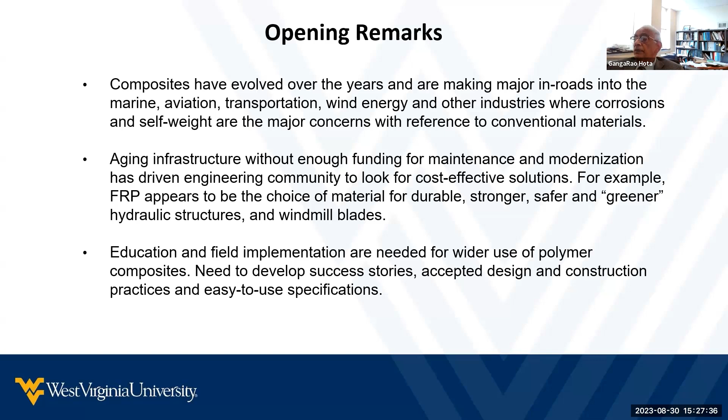This webinar, we are providing also the educational component. The structure of the course is such that the webinar is divided broadly into 4 modules. The first one being this one, entitled Introduction to Constituents of Composites, including manufacturing and their applications.

The second module is going to primarily deal with the durability or the long-term behavior under varying environmental conditions, including moisture, freeze-thaw effects, pH variations, sustained stress like the dead load or the pre-stressing effects coming onto a structure.

The third module is going to deal with the micromechanical properties determination of composites based on fibers and resins that go into the composites. And the final 4th module will deal with the design of composite members under tension, bending, and compression.

Due to time constraints, we will not get into composite system design, especially focusing on joints in these 4 modules, though we have a wealth of technical information in the form of slide presentation for the design of composite systems.

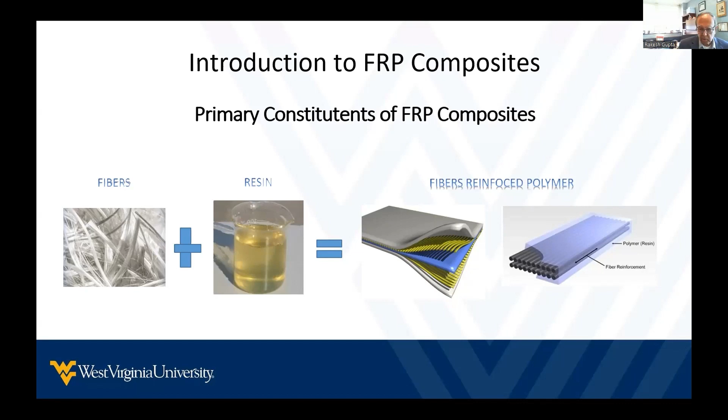A composite, then, is a heterogeneous combination of two or more materials. In fact, as the name suggests, there are two or more distinct phases which you can see under a microscope. So you have reinforcing elements such as fibers and fillers, and you have binders as resins or polymers. These materials differ in form or composition on a macro scale, and this is easily seen under a light microscope.

There exists an interface between these materials, and one often needs a coupling agent to promote adhesion between the fibers and the matrix. With glass fibers, the coupling agent is typically a silane.

The role of the two major constituents is, for the fiber, it is bearing the load, and for the resin, it is to transfer load to the fiber network, especially in shear, so that one can have a high interlaminar shear strength.

We want to maintain proper fiber orientation, and the resin prevents bunching up of fibers. In addition, a very important role of the matrix is to protect the fiber network from a damaging environment, things such as humidity and high temperature, as well as oxidation. Else, durability suffers. And the nature of the fibers, the matrix, and the geometry of the part to be made dictates the processing conditions of time and temperature.

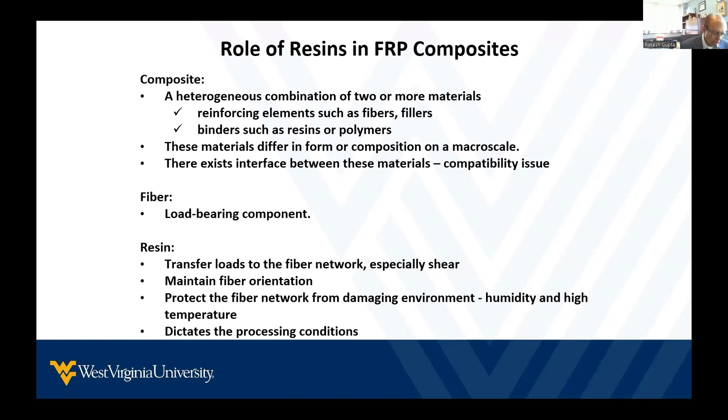All polymers are made from small molecules called monomers. When these monomers are combined, you get a linear molecule having a long chain structure. Most thermoplastics, such as high-density polyethylene, which are used for making milk containers, have a linear structure.

In addition to a linear structure, one can have branches emanating from the backbone. One can have long branches, and this is what is observed in low-density polyethylene, which is typically used for grocery bags.

When these long chains get linked together, the branches get linked together by cross-linking arms, they can form a network. In cured thermosets, such as vinyl ester, polyester, and epoxy, you have a network structure. An example of a network structure is rubber.

Natural rubber is a linear molecule. It is cross-linked with sulfur, and the process is called vulcanization. That makes rubber useful.

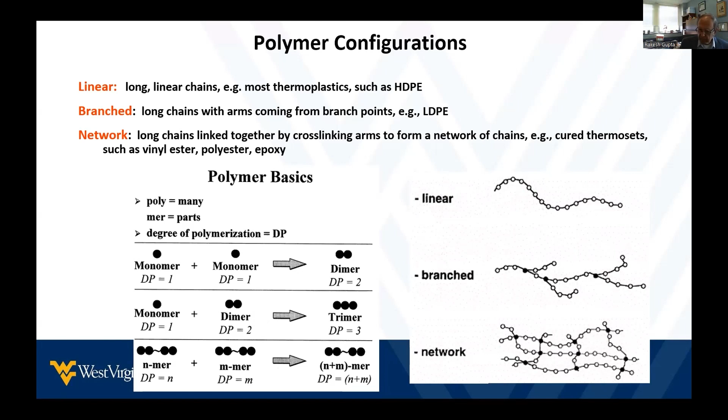The world of polymers is divided into thermoplastics and thermosets. Thermoplastics are large molecules which have already been made in a reactor, and then they are used to make useful products. With thermosets, one begins with small molecules which have a low viscosity.

Once the thermosets are formed, they do not flow upon heating because the liquid resin is cured and becomes rigid.

Other characteristics of thermosets are that the cured polymer is less temperature sensitive than thermoplastics. It will not soften upon heating.

The network structure exists throughout the part, and you have thermal stability so that the polymer does not flow upon heating. However, it can degrade at high temperatures.

The advantages of a thermoset over a thermoplastic is that one deals with low viscosity materials. As a result, one gets good fiber wet out, which means that there's good adhesion between the resin and the fibers, which results in a low void content.

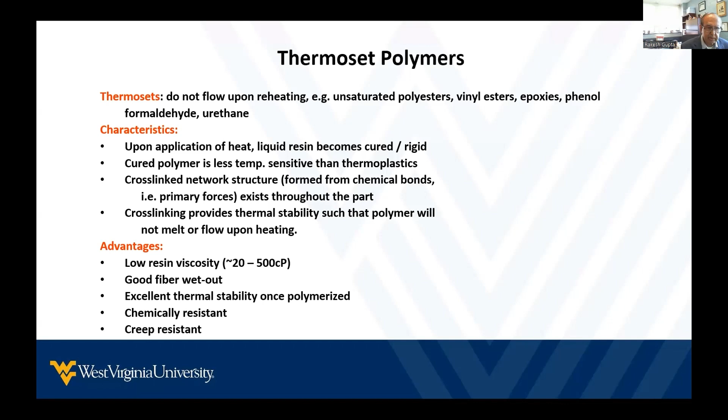There's excellent thermal stability once the material is polymerized, and the material is chemically resistant and creep resistant. Thermosets have some downsides as well. They are brittle, which means there's a low elongation at break.

With thermoplastics, one begins with a large molecule, and one heats it, it melts fairly quickly. You make a part, you cool it, it solidifies, and the process is over relatively quickly.

With thermosets, there can be a long fabrication time, especially when one deals with epoxies. There can be a limited storage life at room temperature before curing, because one uses curing agents such as peroxides. Even at low temperatures, they can decompose and curing can begin, so the shelf life is limited.

Thermosets are non-recyclable by standard techniques because they typically will contain fibers and fillers. The molding of the part is in the shape of the final part, which means that once we have made the part, we cannot change it later on, so these materials are not post-formable.

The most common thermosets are polyesters, epoxies, and vinyl esters. The polyester that's used is typically an unsaturated polyester, which means that there are double bonds present.

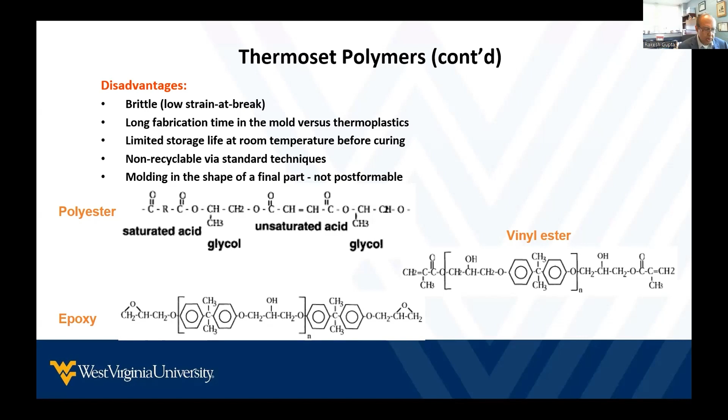If you look at the vinyl ester molecule shown here, it has double bonds at the two ends. These double bonds are then the sites for cross-linking.

Polyesters and vinyl esters are cured by dissolving the prepolymer in styrene, followed by cross-linking with the peroxide. Epoxies are cured using amines.

So you start with monomers, you get a prepolymer, you then cross-link it with either a peroxide or an amine, and the result is that you start getting molecules which have branches emanating from the backbone.

The glass transition temperature rises as curing proceeds. If the glass transition temperature reaches the cure temperature, the reaction stops, and this is called vitrification. If the temperature is raised, curing is resumed.

Typically one uses a temperature at which the cure goes to completion. Once it is completed, the material is typically used at a temperature below the glass transition temperature. If one goes to a temperature above the glass transition temperature, the material is rubbery.

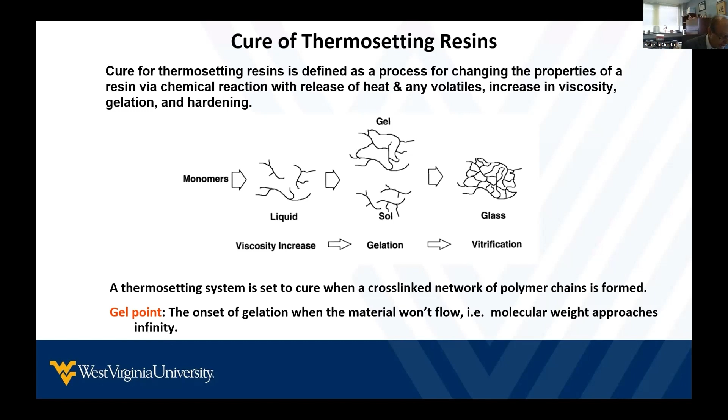For a given reactant concentration, the extent of cure, meaning how close the material is to being fully cured, depends on time and temperature. Also note that polyesters and vinyl esters typically shrink on curing.

Typically, for epoxies, it takes 60 minutes to several days for complete curing, whereas for vinyl esters and polyesters it takes 30 minutes to an hour. For urethanes, one can get curing in a matter of seconds.

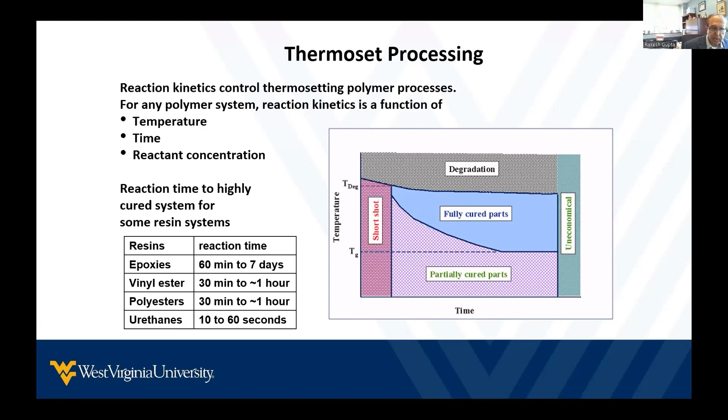The behavior of polymers depends on the temperature at which one is examining the behavior. At low temperatures, there is very little molecular motion and the material is glassy, which means it is brittle and rigid.

Under these conditions, if one tries to deform the polymer, one stretches secondary chemical bonds. This takes a lot of effort, and the material, therefore, is stiff.

Above the glass transition temperature, molecular motion begins, and parts of the polymer can uncoil or unwind when we try to deform it. As a result, the material is softer. We call it rubbery.

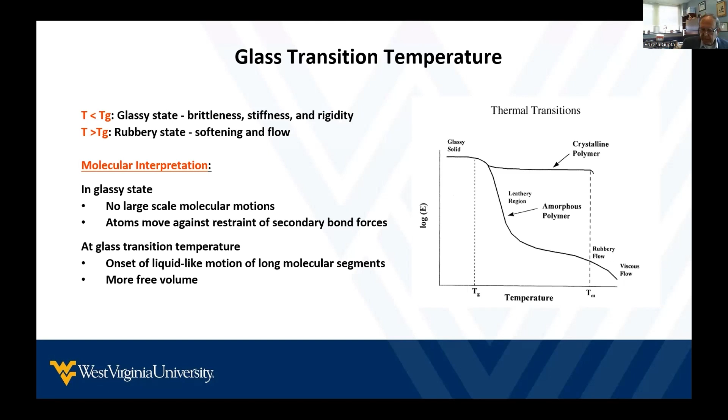For composites use, we use a temperature which is less than the glass transition temperature. This inhibits creep. However, we can enhance toughness by adding elastomers to the resin used in the formation of thermosets.

Turning our attention now to the other component in a composite, which are fibers. The most common kinds of fibers are glass fibers, and the glass fibers can be of different kinds. They are designated as E-glass, S-glass, or AR glass. E-glass are the most common ones. E stands for electrical. These have high electrical insulation, low susceptibility to moisture, and very good strength.

These are most commonly used because they are also the lowest cost glass fibers. S-glass fibers have high strength, and the S stands for strength. The AR have improved chemical resistance, and AR stands for alkali resistance. These S-glass and AR differ from E-glass because of a difference in chemical composition.

Glass fibers have many advantages, particularly low cost, high strength, high chemical resistance, resistant to fatigue, and good insulation properties. They also have some limitations: low tensile modulus, high specific gravity compared to carbon fibers. They're not as resistant to abrasion while handling, and they have high hardness.

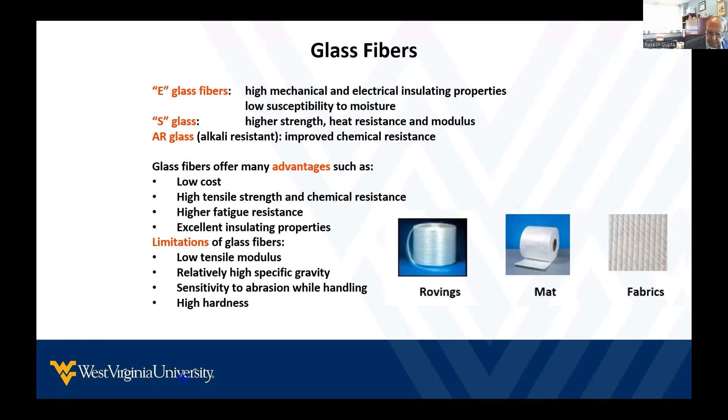Glass fibers come in different forms. One can have a spool, or a group of untwisted strands, which is called a roving. A mat can contain uncured resin, and then one can make fabrics from rovings. These different forms are relevant for different composite manufacturing operations.

The other major kind of fibers used are carbon fibers. Here one typically starts with a textile fiber and removes all but carbon atoms by heat treatment, and the textile fiber one uses is PAN, or polyacrylonitrile. It offers good strength and high modulus, also excellent compression strength. One can get even higher moduli if one uses pitch fibers, and the pitch could be typically derived from petroleum asphaltenes. Here one can go to a modulus of up to 140 MSI.

The coefficient of thermal expansion of these materials can be relatively low, and this offers many advantages. The major advantages of carbon fibers are high tensile strength to weight, very low coefficient of thermal expansion, and high fatigue strength. The major disadvantage is high cost compared to glass fibers. In addition, they can be brittle and have low impact resistance, and being made of carbon, they're electrically conductive.

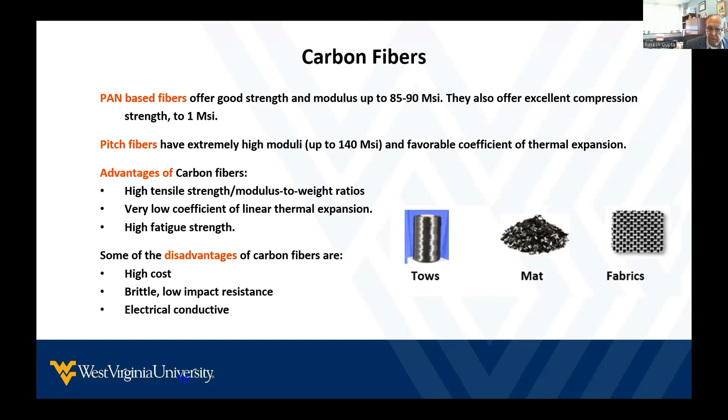And as in the case of glass fibers, they can be in the form of a roving or tow, in fabrics, and as a mat.

It is often advantageous to use a preform because it gives fabrication advantages, especially in operations such as resin transfer molding. So we do not use fiber rovings; we use a preform mat, which is an assembly of reinforcing fibers already shaped and oriented in the form needed and placed in a mold.

These can be highly permeable, so they allow resin to be infused, and they have a high degree of structural integrity. The disadvantage is that they can have poor stiffness, limited strength, and the volume fraction of fiber is not as high as one can get if one used rovings.

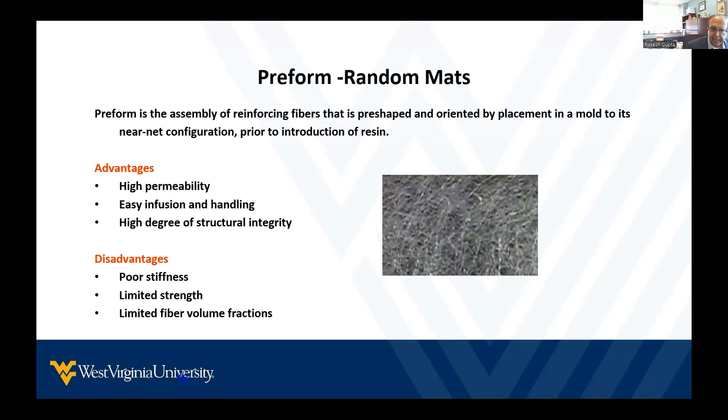The rovings that one can employ can have different architectures. If all the fibers are aligned in the same direction, we have a unidirectional roving. What is shown in the figure is unidirectional rovings have parallel filaments which are held together by stitches using a yarn. Since they're all pointed in the same direction, the stiffness and strength can be very high in the filament direction.

However, the mechanical properties perpendicular to the axis of the fibers are not as high as those along the axis. Also, one can have bunching of the fibers, which is what we call fiber wash. Clearly, the properties are anisotropic; they depend on the direction, and the properties can be poor in a direction perpendicular to the axis direction.

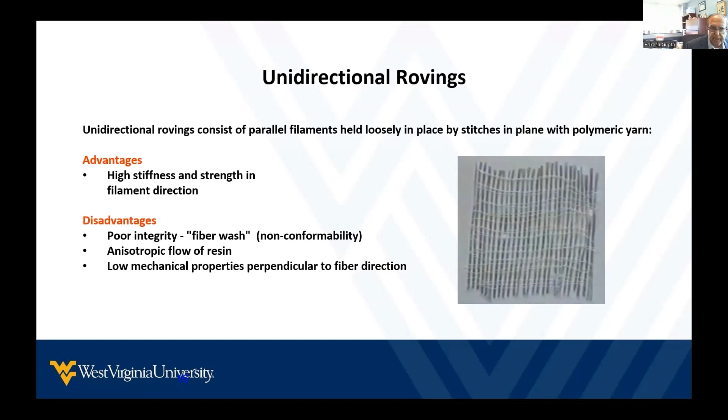To address the anisotropic properties, one can use two-dimensional woven fabrics. The weaves can be classified as open or closed, depending on the spacing between the fibers. These give balanced properties in the plane of the fabric, good impact resistance, and good conformability. However, moving our hands on top of the fabric reveals undulation, and there can be difficulties in trimming or handling these fabrics.

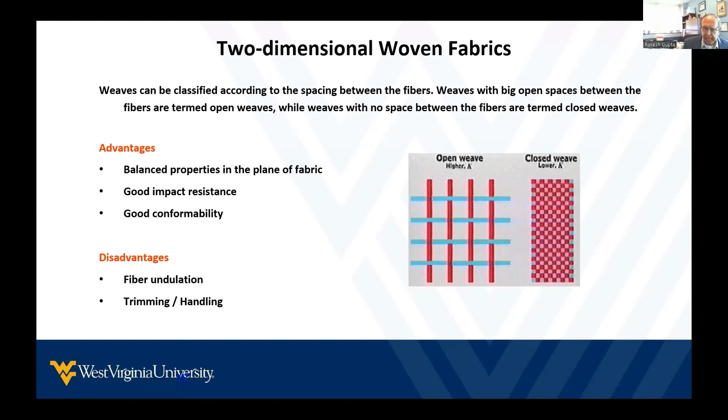So now we've talked about the resin, we've talked about the reinforcement. The two come together in a manufacturing operation. The simplest manufacturing operation for making composites is hand layup. Here we put reinforcement into an open mold, add resin, compress the two with a roller, and then heat the material to initiate curing.

A more complex operation is RTM, or resin transfer molding. Here you put a preform in a mold, close the mold, inject uncured polymer, and heat to cure.

The third common important operation is compression molding. Here you use a sheet molding compound, which is a sheet of fiber and resin. You put it in a preheated mold, close the mold and apply pressure, and this results in curing.

A continuous operation is pultrusion. Here one starts with unidirectional glass fibers and continuous strand mat. It goes into a resin bath, and you pick up the resin.

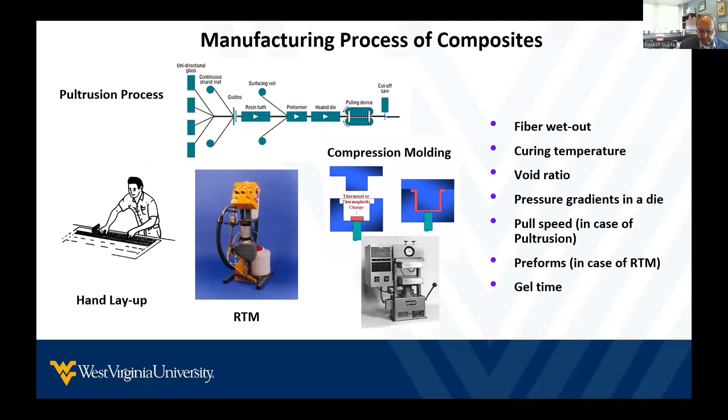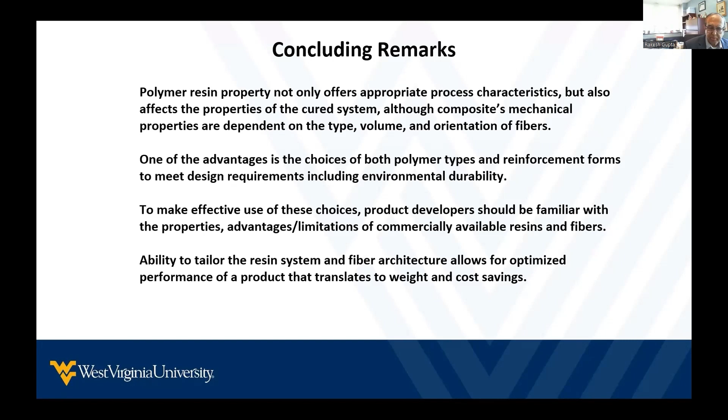So to conclude this introduction to composites, the composite properties depend upon both the reinforcement and the resin, and they depend on the processing conditions. One of the advantages of the appropriate choice of polymer and reinforcement is that we can meet design requirements. We typically do not wish to over-design a part because that adds cost, but we have so many variables that we can address the needed requirements for mechanical properties and durability.

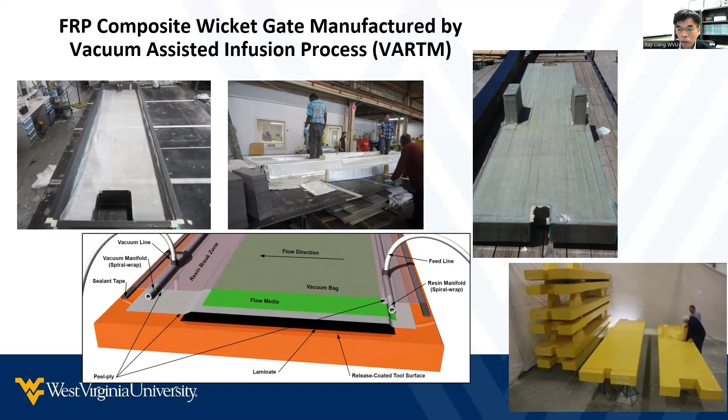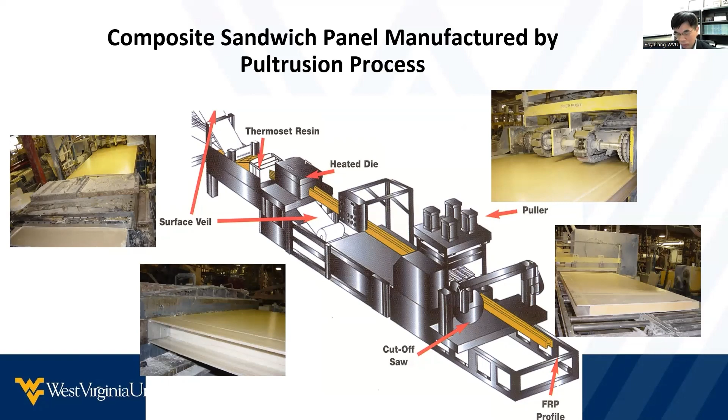WVU Constructed Facilities Center, under the leadership of Professor Hota Gangarao, pioneered FRP research and development in 1987 with an NSF-sponsored research workshop entitled FRP for Construction. At the workshop, research topics, challenges, and gaps to bring FRP into practice were identified, followed by extensive exploration in many aspects including durability and a large number of demonstration projects in many states.

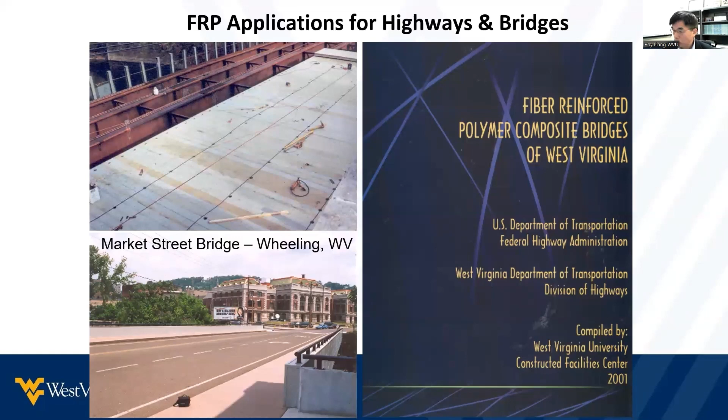As you know, typically FRP deck in weight is about 1/6 of a concrete deck. From generation 1 to 4, the weight per unit area has been reduced to half. Instead, the performance has been 4 times higher from generation 1 to generation 4. Similarly, cost-wise, cost has been reduced to only 1/3 of the original version of the bridge deck. All these advancements were accomplished by adoption of efficient design and advanced manufacturing at higher productivity, along with higher joint efficiency.

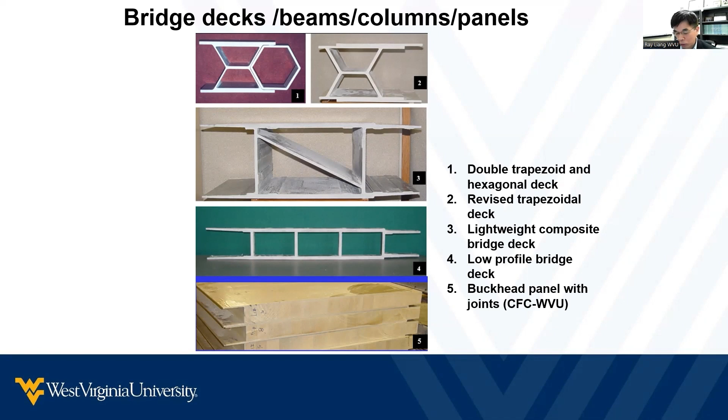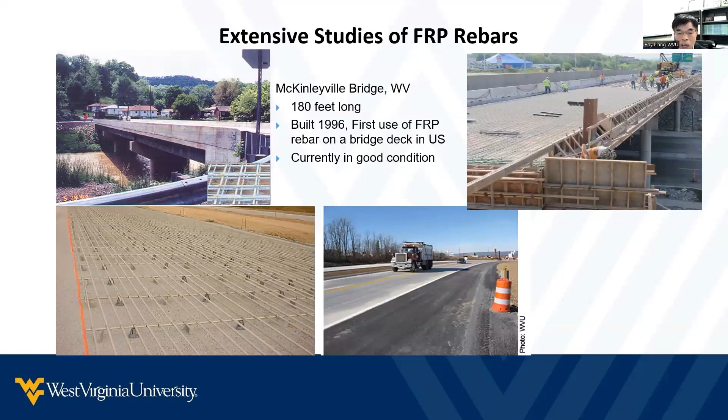FRP wrap technologies, including design aspects and installation procedures, have been very well developed. The effectiveness of the retrofitting can be easily established by conducting load capacity tests before and after doing the rehab.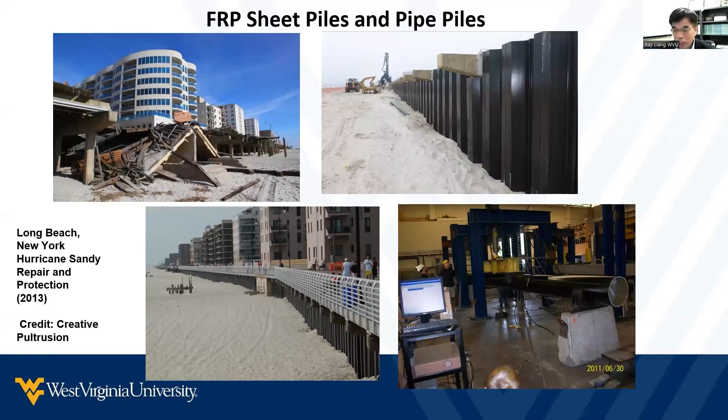This shows a 10-foot wide, 70 feet long GFRP composite pedestrian bridge being constructed using a WVU structure truss member, individual truss members, and FRP deck. WVU also evaluated several other bridges. All these efforts not only led to the use of FRP pedestrian bridges in an economic and durable manner, helping different clients located in rural and urban areas, but also generated inputs to revise and refine US AASHTO design specifications for FRP pedestrian bridges.

The bottom right picture shows the world's largest, or longest, pultruded FRP bridge by Creative Pultrusion, constructed in Bermuda.

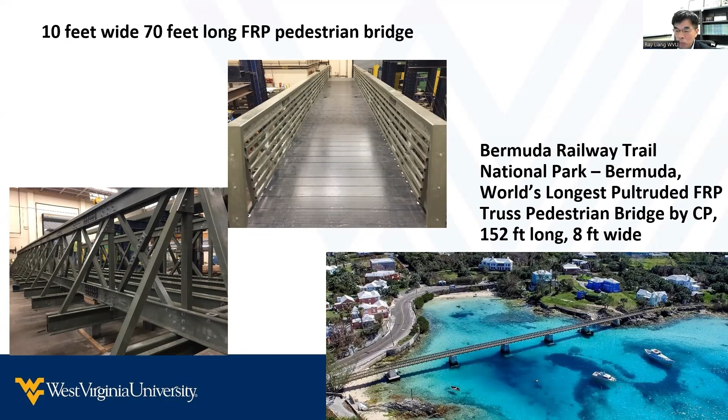Let's move on to the waterway applications. In June 2020, working group 191, composite for hydraulic structures under the World Association Waterborne Transportation Infrastructure, known as PIANC, released design guides or case studies, composite for hydraulic structures, as you see here, the book cover, showcasing FRP composite.

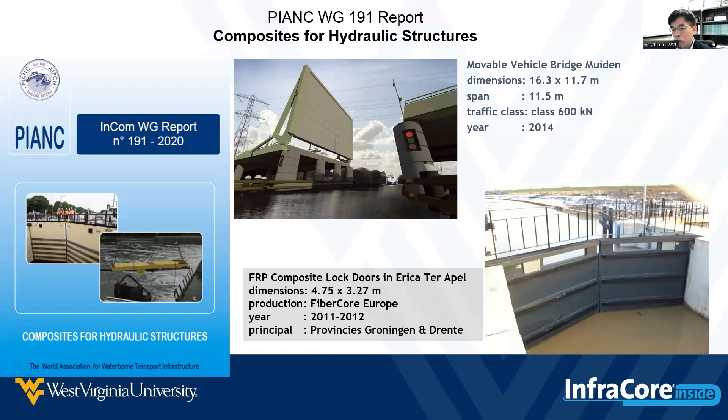In the center of the slide shows a movable vehicle bridge using FRP structures in Muiden, Netherlands.

For the mitre gate applications, engineers and designers in Netherlands are leading the way. This picture shows the world's largest FRP mitre gates in Wilhelmina Canal, Netherlands. It was designed by Infra Core, with a size about 20 feet in width, 43 feet in height, using glass fiber and polyester with vacuum assisted resin transfer molding.

The design life is over 100 years. The initial cost of the FRP structure is lower than a conventional structure. It was installed in 2014, still performing outstandingly so far.

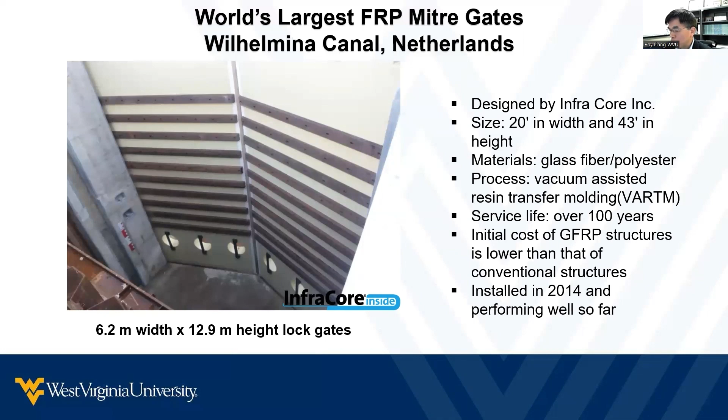This picture shows a WVU case study using off-the-shelf FRP products to construct a recess panel in replacement of steel panels, which are costly, heavy, and they corrode. This product was installed in 2016.

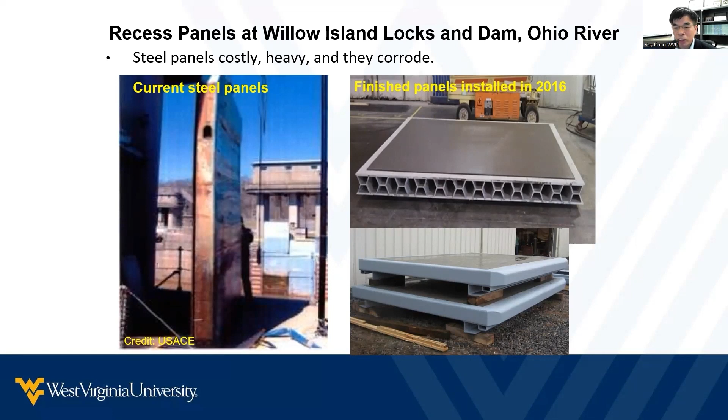In short, we are able to bring the load capacity back to original design at only 25% of traditional repair cost, with use of composite shell wrapped around with FRP wraps and then filled with concrete. This really demonstrates composite as an enabling technology.

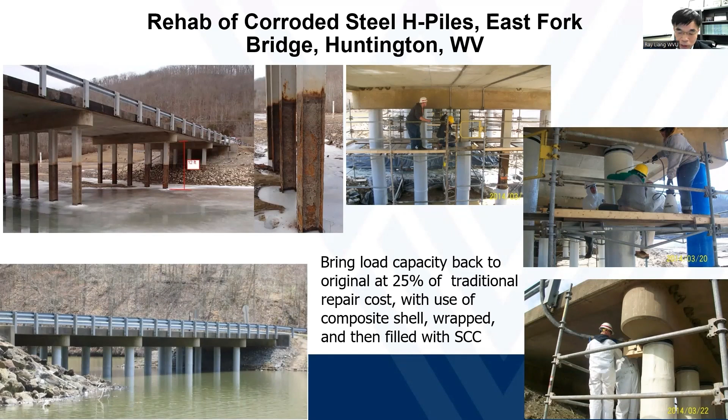We see the FRP wicket gate again, just with more details in field implementation. U.S. Army Corps engineers, who manage the United States waterways, have ordered 220 FRP wicket gates. As of today, 114 composite wicket gates are being delivered by Creative Pultrusion.

This case really highlights successful showcasing of fundamental and applied research leading to field implementation, with composite advantages including innovation, design flexibility, non-corrosiveness, and durability.

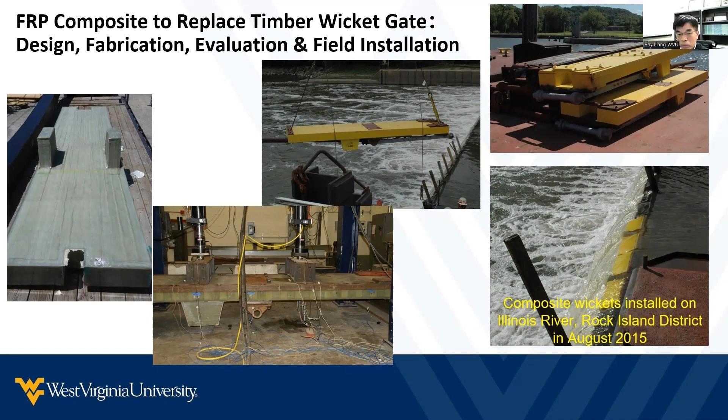Now we move on to utility poles, which is a multi-billion dollar business, even just the annual replacement market, and a new market also about several billion dollar business. On the right you see FRP poles being tested in a structure lab.

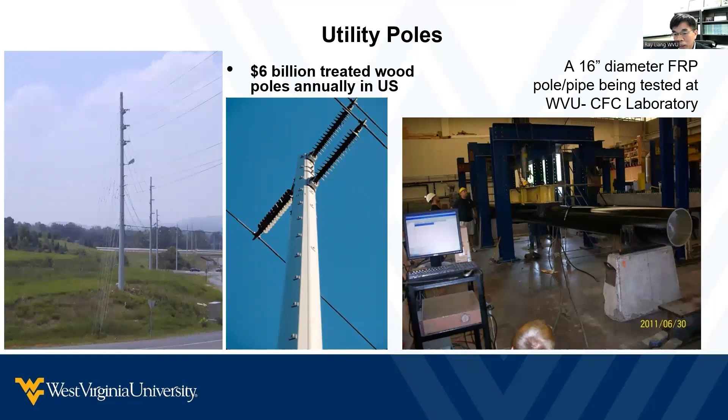FRP poles have been receiving more attention from utility companies due to their advantages over wood, steel, and concrete. But in general, people believe FRP poles will burn under fire.

Since wildfires pose a threat for FRP poles, sponsored by the Electric Power Research Institute, WVU researchers have conducted research on fire performance of FRP poles extensively. We have developed a flame test that simulates wildfire, giving about 1,000 degrees Celsius constantly, and we subject the FRP poles to flame exposure for 1 minute, 2 minutes, 3 minutes.

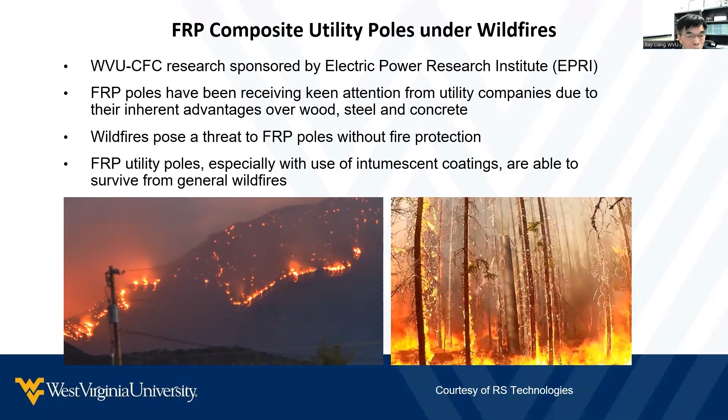In conclusion, our research shows FRP poles, especially with use of intumescent coating, are able to survive general wildfire, while use of sleeve protection methods will provide full protection of the FRP poles. All this helps utility companies use FRP composite poles with confidence.

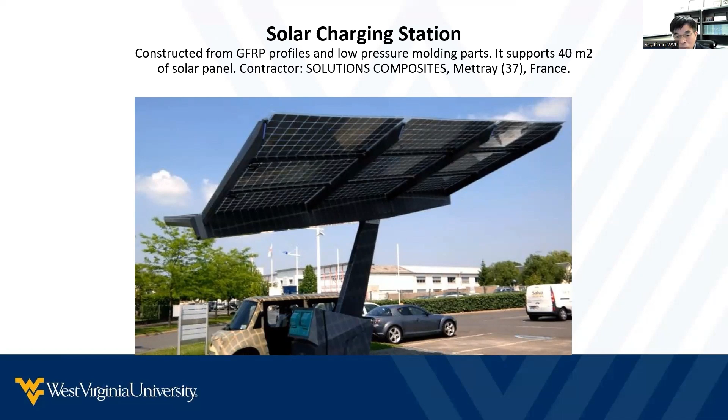ACMA has a dedicated working group on this. This application is regarded to have huge potential to be one of the major drivers for future composite growth. It is expected to be a multi-billion dollar business in this topic alone.

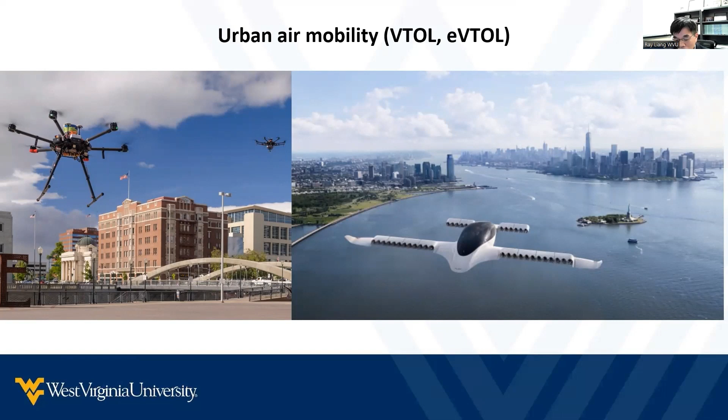So in conclusion, advanced composite advantages over conventional materials in harsh environments, including weight-sensitive applications, include design flexibility, non-corrosion, high performance per unit weight, and durability.

Universities, in collaboration with government and industries, have made major strides with FRP applications. Based on limited in-service data, in-service FRP composite systems for infrastructure applications are leading to longer service life, lower initial and lifecycle cost. With code acceptance, FRP composite has become an integral part of infrastructure applications, including retrofit of aging structures at 15 to 30% of conventional repair cost.

Society, or our community, will benefit from the increased use of reliable and durable composite materials with low maintenance, longer service life, and green products.